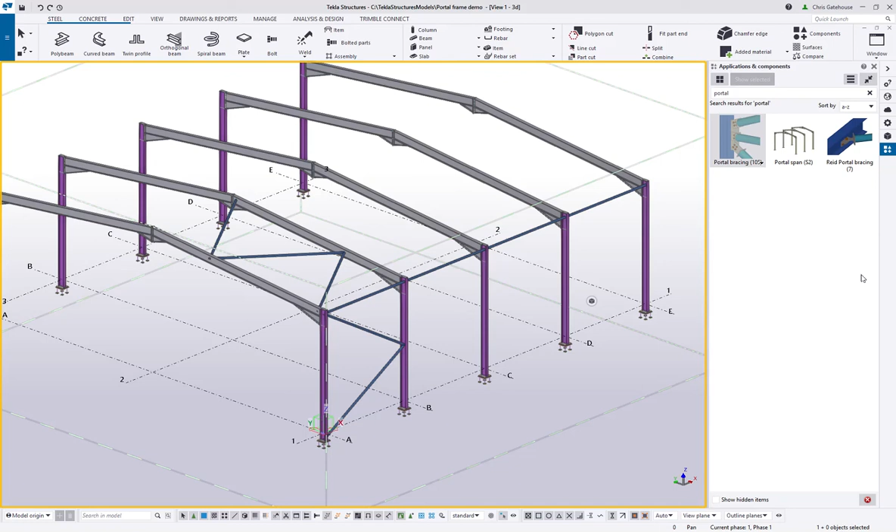Okay, so let's start looking at the connections for the bracing. For this component, I'm going to use component number 20, tube gusset, and you apply these components the same way as all the other components you've seen up to now - primary member, secondary member, middle button to complete.

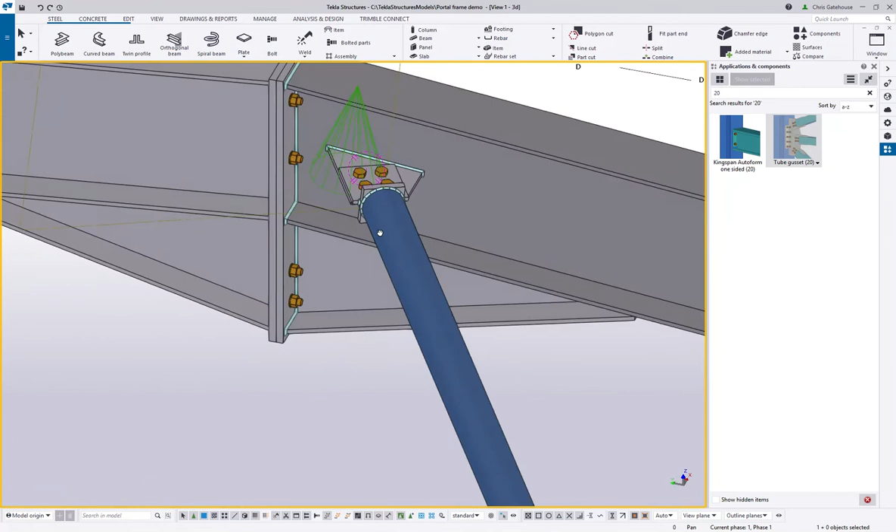Okay, so we've got a straightforward tubular bracing connection here. Just to explain, we can open up this dialog window where you're configuring the geometry of the connection, and for the gusset plates we specify those here. So we've got a gusset plate of 12 mil, and for the bracing connection we've got a connecting plate of 12, and an end plate which is 20.

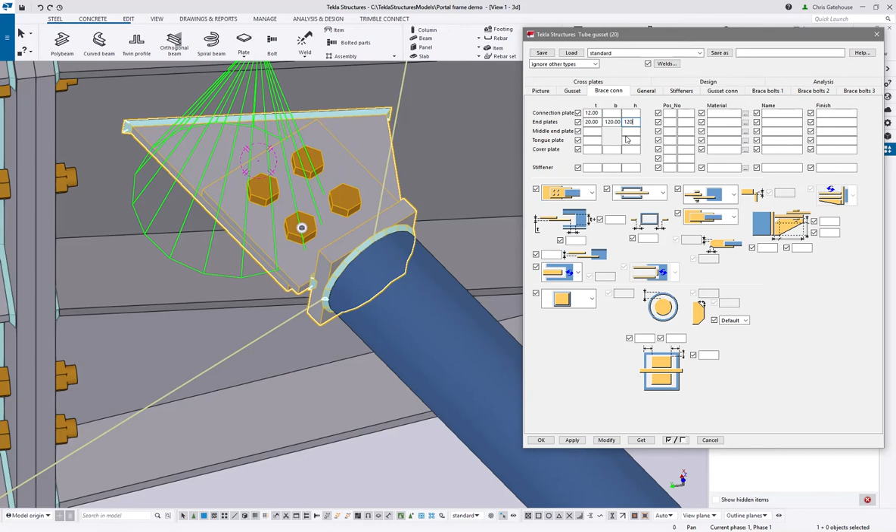I'm just going to make that end plate a little bigger - that's not quite right, I should imagine it's 150, something like that. Okay, we'll leave it at that, that looks pretty sensible to me.

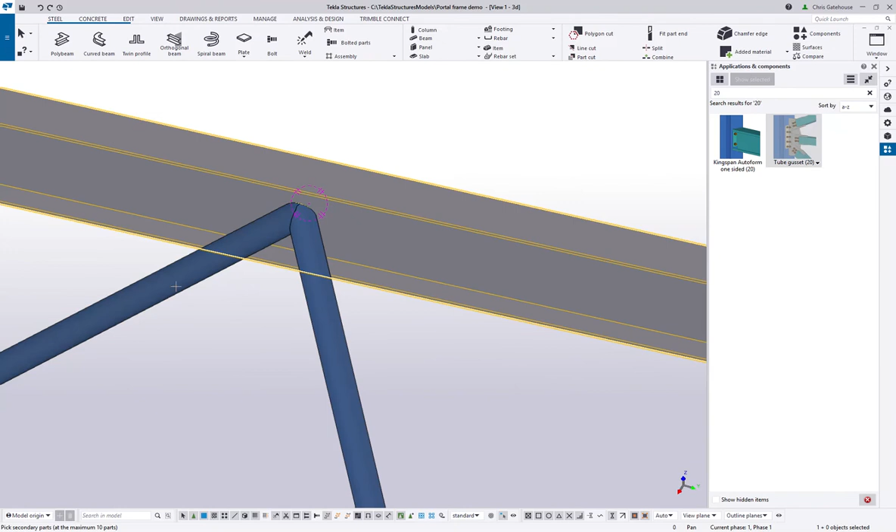Now I'm going to use the same component for all the bracing connections, whether they're double connections or not. Let's see what happens when we do a double connection. You can see it puts a double component, a gusset, in that picks up both bracings, and it also makes sure they're not clashing, which is pretty useful. So we can use that same component for all of the bracing connections.

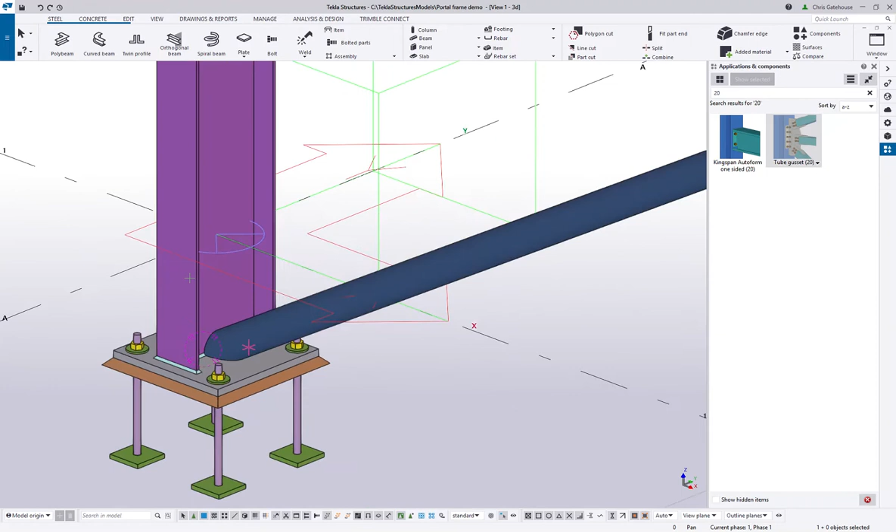Like so. We can also use it for the vertical bracing. So if I go down to the base plate, you'll see this one component is very versatile. So there is a clash there that we can take care of - that's no problem at all.

So if we open up the dialog box, I can change this specification here. Let's change it to 100 just to show what it does. So it will bring the point here from this plate - it will make the gap from that point to the face of the column 100 mil. And you can see it's taken it down to the base plate.

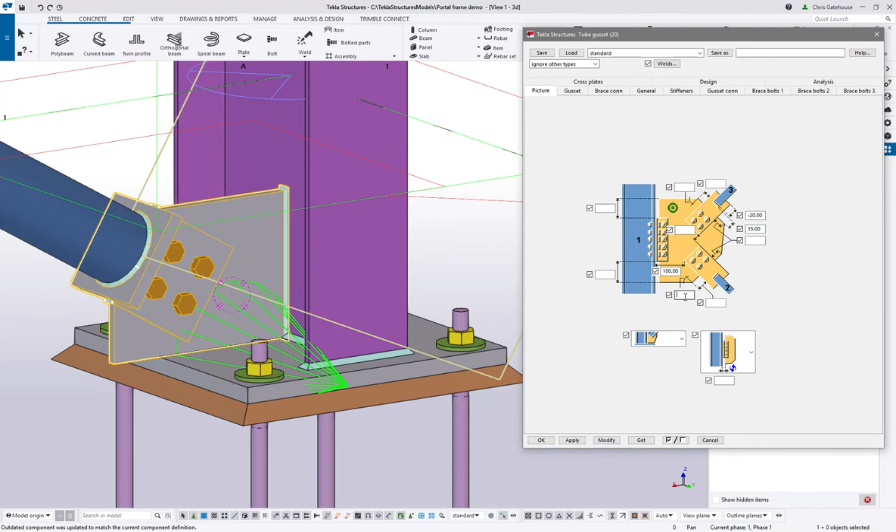I can actually manipulate the size, the shape of that gusset plate so that it trims it back to the edge of the base plate as well. So if I put 200 in there, you can see what it's doing to the gusset plate, which is pretty useful. Okay, I'm just going to load in the standard, reset that.

And then go to this again. You can see it's taking care of the clash - we don't need to worry about it.

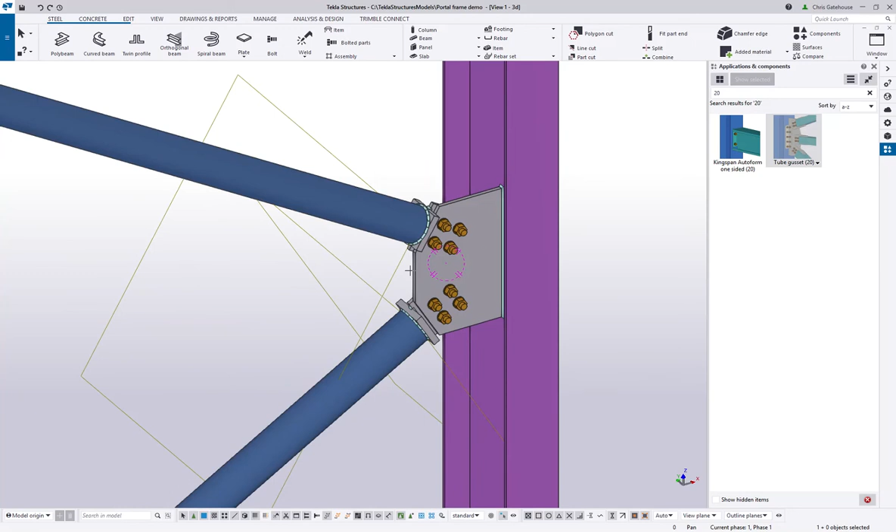And then up at this top one, where it meets the eave tie, again that gusset's pretty big. We could correct that by bringing the endpoint of this brace down, which would make that gusset a bit more sensible. A bit too far - something like that.

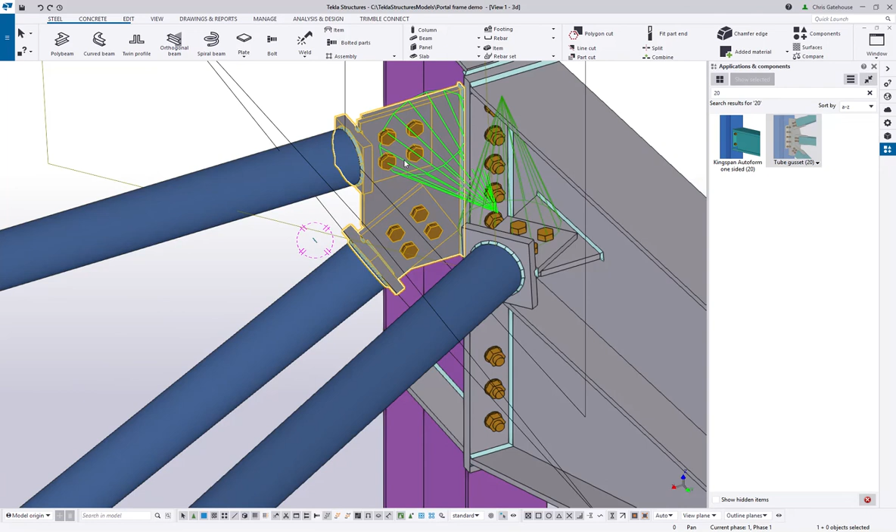Okay, just realized that the end plates for these were reset, so we'll just modify those, get those back up to 150s, which is good. Let's get those done as well. Make sure that one's okay - that's fine.

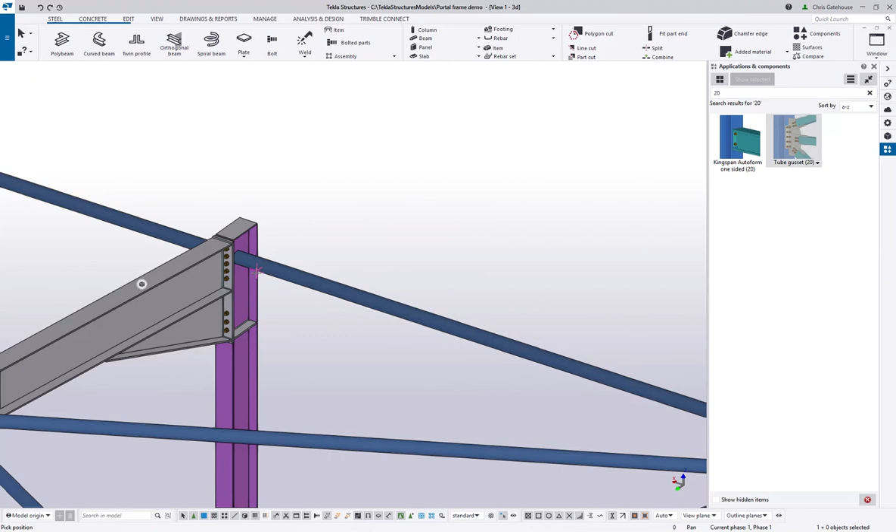Right, now the rest of these eave ties. So you'll remember that I drew the eave tie in as one long member - we've got to break this down now into the individual spans. So if we go to the edit tool, go to the split command, pick the part, pick the split point, and that will break that one member down into multiple members. That's just a shortcut to make sure that the axes are in line.

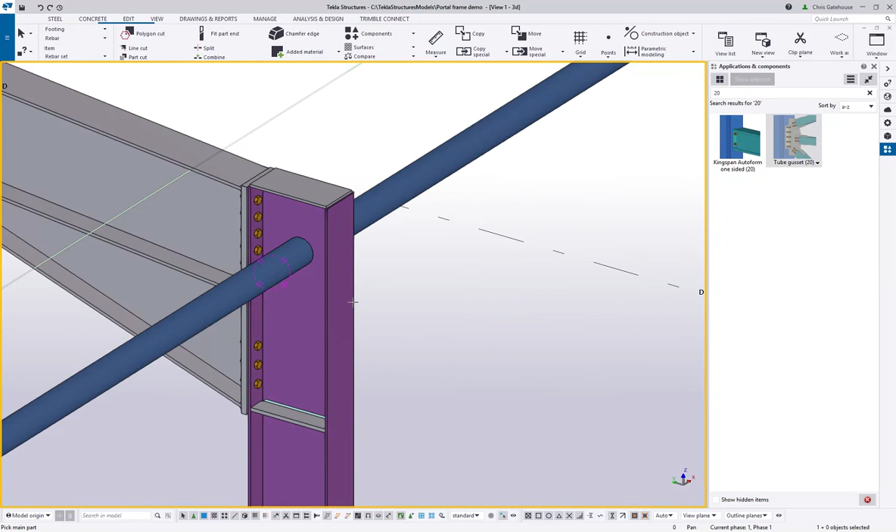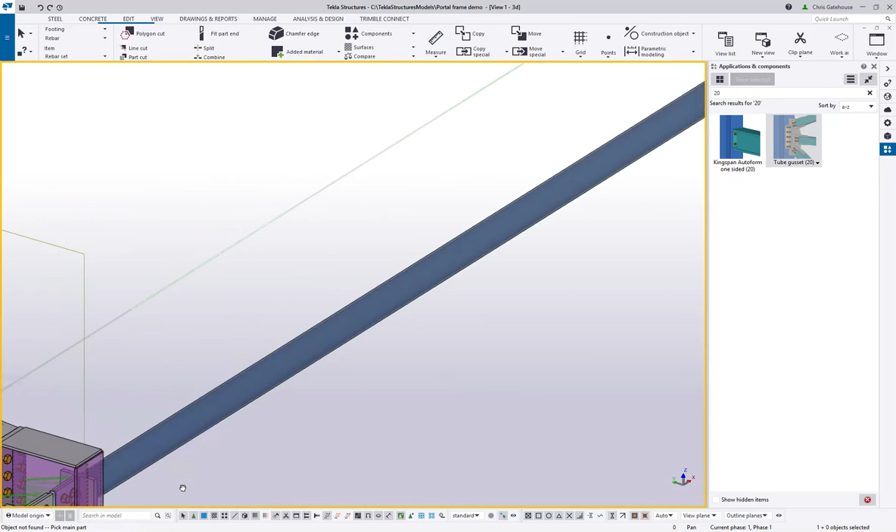Okay, so let's go down and complete the rest of these. I don't need to see through it to know I did it, but I can change the rendering level so that we can just double check those components are going in as intended. I need to be a bit more accurate with clicks with this rendering level set. Let's go down here and click those. Okay, so those are done.

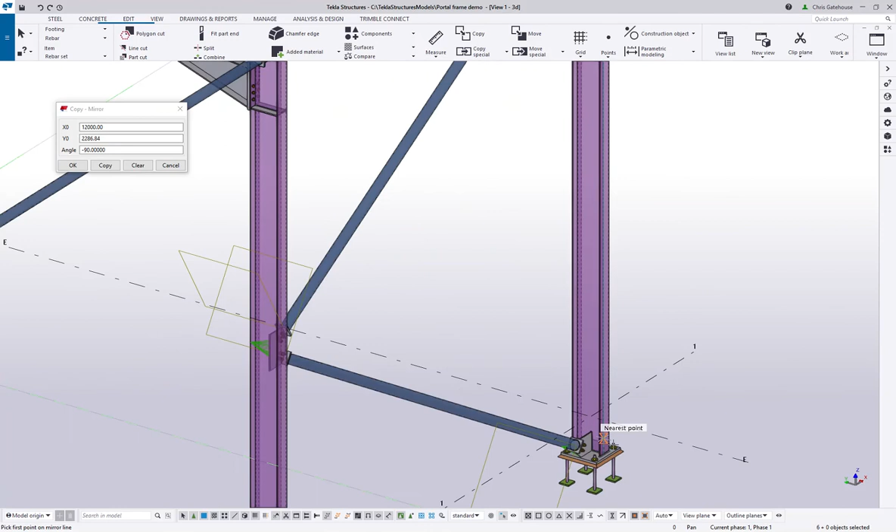So inevitably you'll be thinking, well, what about the rest of the bracing? Well, you might remember the mirror command I used at the beginning for the rafters. I can utilize that again, but in order to do that I need to take this eaves tie out. So I'm going to select all of that bracing like so, and then copy special mirror that. I'm going to mirror that around grid line C, and then I get a complete brace bay with all of the components carrying over as well.

And then I can select these also. Let's pan that out of the way. And then I can do the command again, copy special mirror, this time around the apex line, and then I've got bracing on the rest of the building.

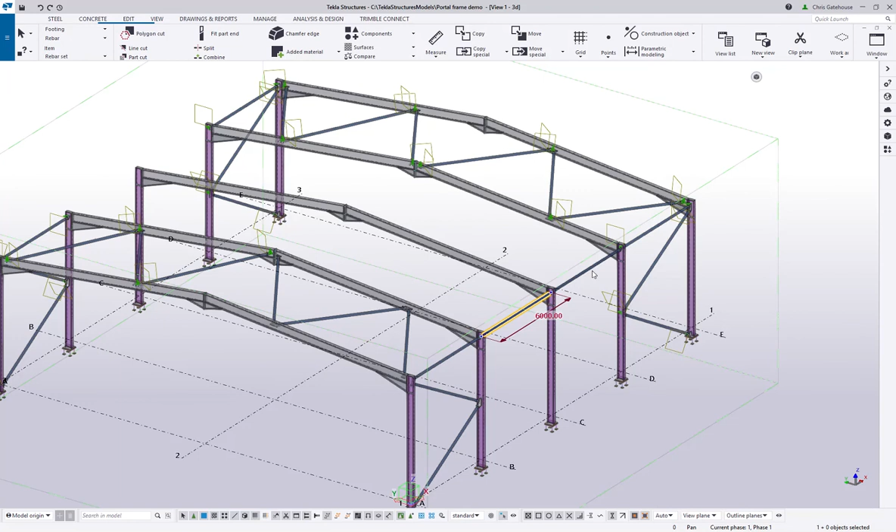Obviously I'm missing those 2 bays of ties, so I can do the same thing there - just select those, copy mirror, done. Okay, pretty straightforward. That's my portal frame done now.